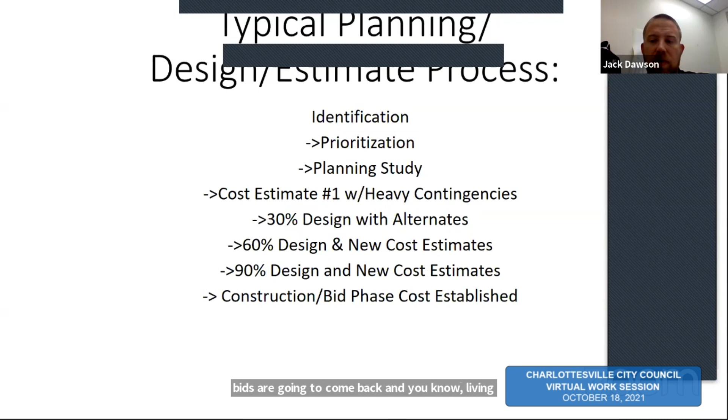And there's some more cost estimates at that phase. And then typically we work through 90% where all the final details are sorted out. And then the real cost here comes when the project's bid, which I do think is important. Even when we're working with very good estimates, you cannot control how the bids are going to come back. And, living through what we just lived through with logistics and costs, supply chains and all that stuff, things can get out of control.

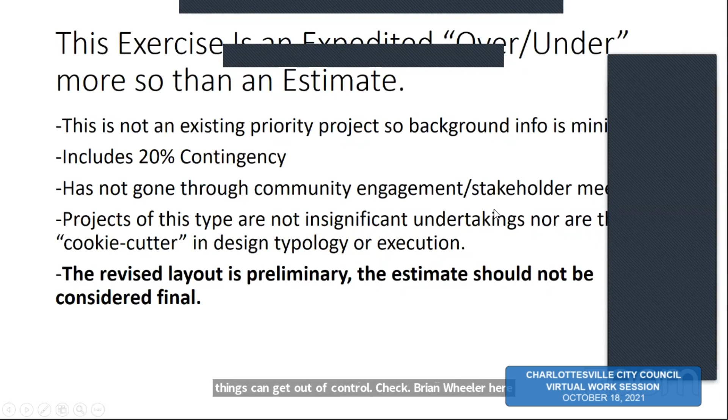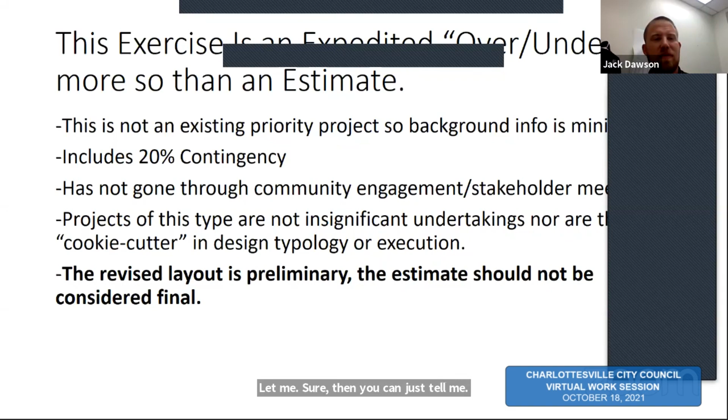Jack, Brian Wheeler here. We're getting some blue bars on your presentation. Do you want me to share the PDF? If you would. Let me do that. Sure. And then you can just tell me. Is this the ADA PDF? Not sure. That's going to be a struggle because that doesn't have pictures and whatnot. It's whatever was in the council packet. Okay, this will work so far, I think. We might have an issue when we get to pictures and the like. Okay, go ahead and tell me when to advance.

Okay, so this is more of an over under than an estimate, as I said, and this is sort of where I put my money on being over. So this is not an existing priority project, so we have minimal background information. We've sort of done planning analysis before, but that's about it. This has a 20% contingency, again, as the design gets finalized the cost typically goes up. The estimates typically go up as contingencies decrease in this process. So this is 20%. Typically, I'd use a larger one at this point, but I try to be as accurate

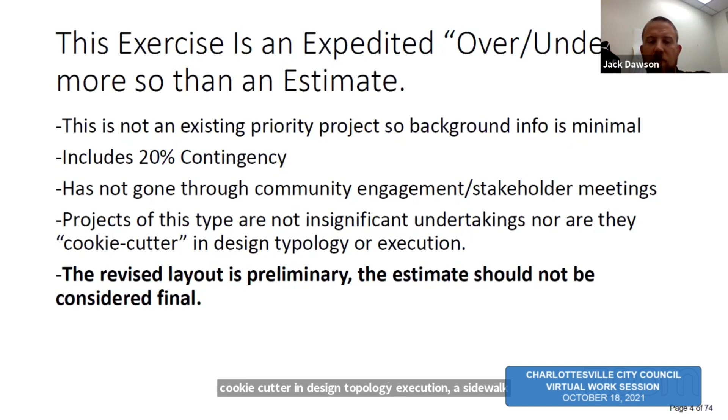as possible. This has not gone through community engagement or stakeholder meetings, which can add significantly to a project, as you may be aware. And then projects of this type are not insignificant undertakings, nor are they cookie cutter in design, typology, or execution. A sidewalk is not just a sidewalk. I've talked about that before, but infill, this is all developed. We're trying to wedge something into an area where it has not been wedged in before, and there's always other

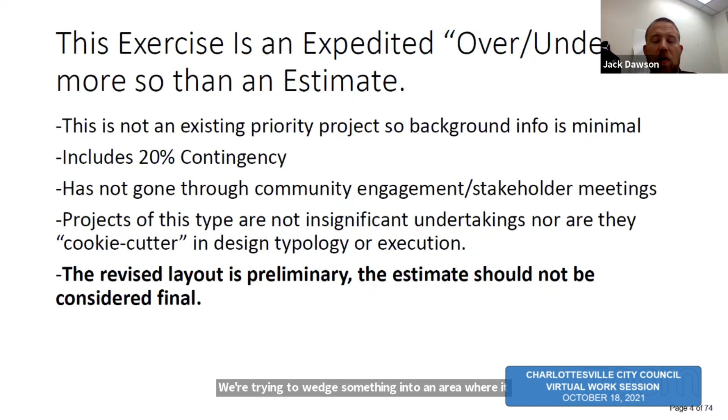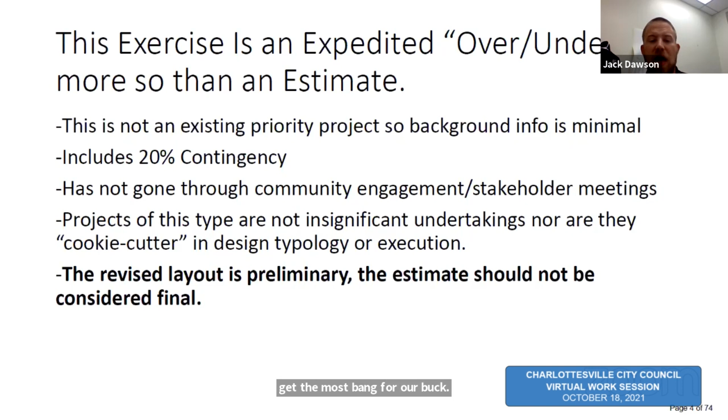issues with that. And so I have a revised layout here, removing sidewalks from both sides of the road and just putting it on one, which is where the city's always felt we'd get the most bang for our buck. But that layout is just preliminary. It's not a final plan or anything. You can advance, Brian.

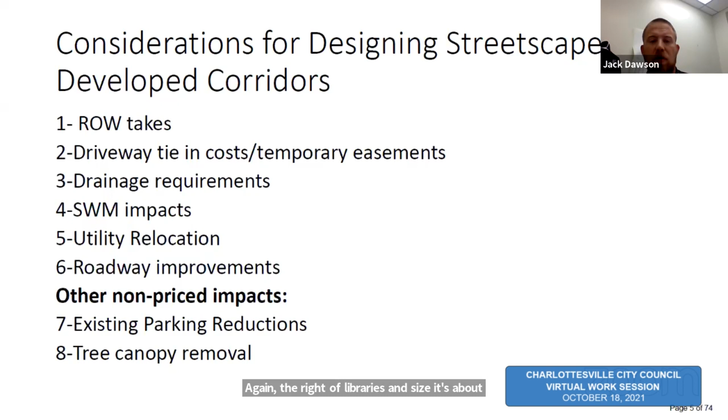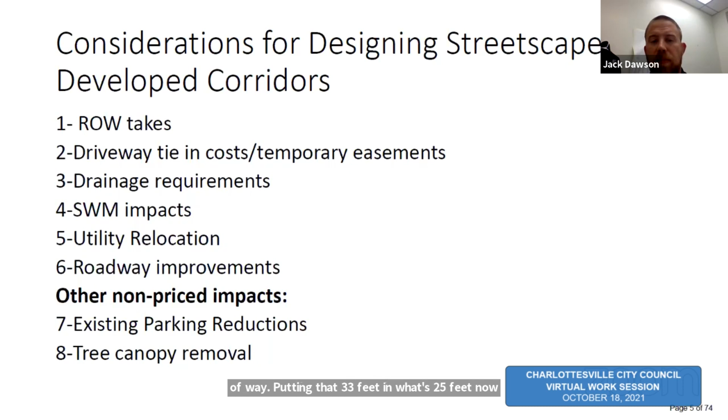Okay, so the considerations that I use for designing streetscapes in these developed corridors is the right-of-way takes. Again, the right-of-way varies in size. It's about 25 feet. The consultant provided 5-foot sidewalks on both sides for a 33-foot right-of-way. Putting that 33 feet in what's 25 feet now requires taking right-of-way to facilitate that. The second category for costs is the driveway tie-in costs and temporary easements associated with doing work on private property.

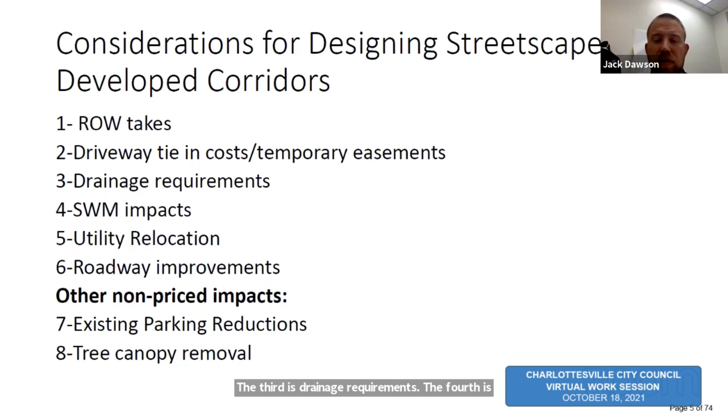The third is drainage requirements. The fourth is stormwater impacts. The fifth is utility relocation, and the sixth is roadway improvements. I did not have as much time as I hoped to get into this, so I didn't get too much into number 5 and number 6, but I'll discuss that when we get there. And then the other non-price impacts I wanted to point out are there are going to be existing parking reductions, and there'll be tree canopy removed as well. Next slide, Brian.

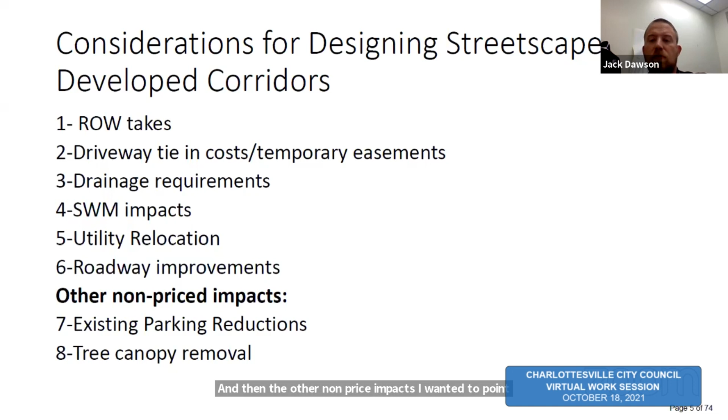So the steps taken here were to analyze the existing corridor for physical constraints with retaining walls, challenging driveway tie-ins, et cetera, and some preliminary safe crossing zones to revise the layout to sidewalk on one side. I then took the estimate that was provided and compared it with the revised layout to come up with areas where costs are likely to escalate and try and put some costs on those numbers, as well as qualify the non-cost related impacts. And then I revised the estimate for the likely escalations that I just discussed. Next slide, Brian.

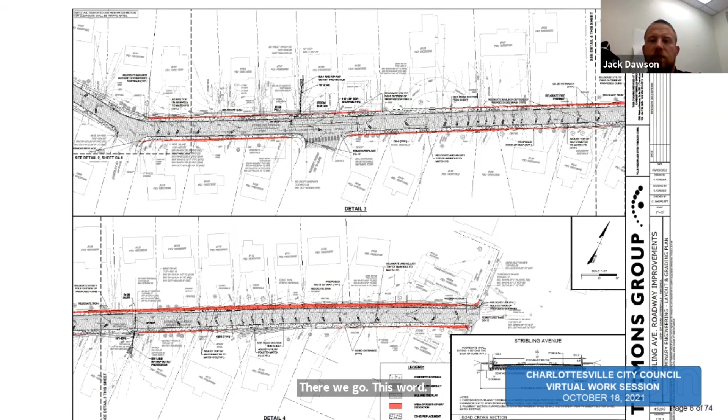So this is the provided concept. All right, there we go. This will work. Perfect. So this is what was provided to my office by the developer and their team. You can see the red hatching on this indicates where right-of-way would need to be taken. So you could sort of use your imagination to back out where it's not wide enough as is. The center line and alignment was essentially held to be the same point, which I think is a good practice. That means if you were to stand out there in the middle of the road right now where it's crested, that would be the future crest of the road.

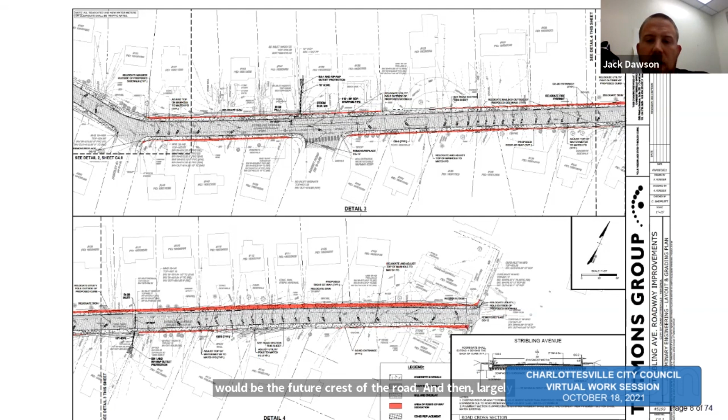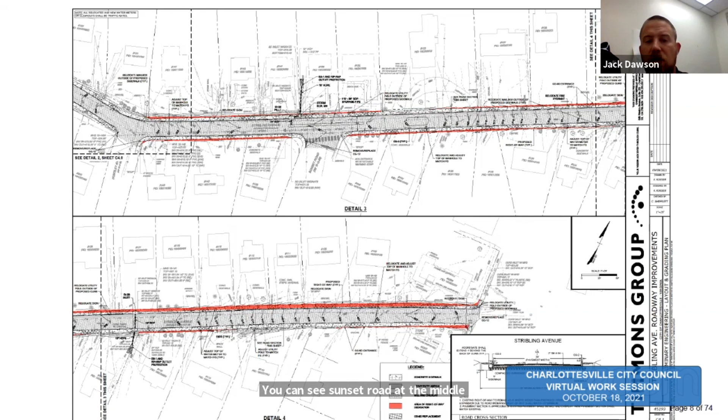And then it largely follows the same alignment with obviously the widening, editing that some, but you can see there's sidewalks on both sides. It starts at the bottom right here. That is JPA. You can see Sunset Road at the middle top with Huntley Road being at the left of this bend. Brian, if you'd advance it, please.

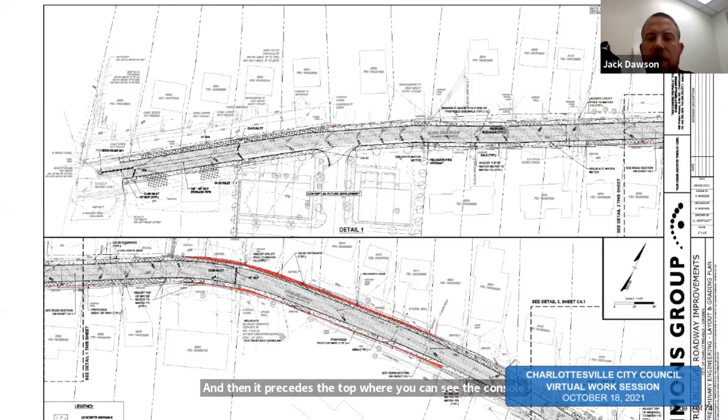It comes up through this bend, crosses the area that was Huntley Hall at the bottom middle, the large parcel there. And then it proceeds to the top where you can see the conceptual future development of 240 Stribling hatched there in gray with the developed area.

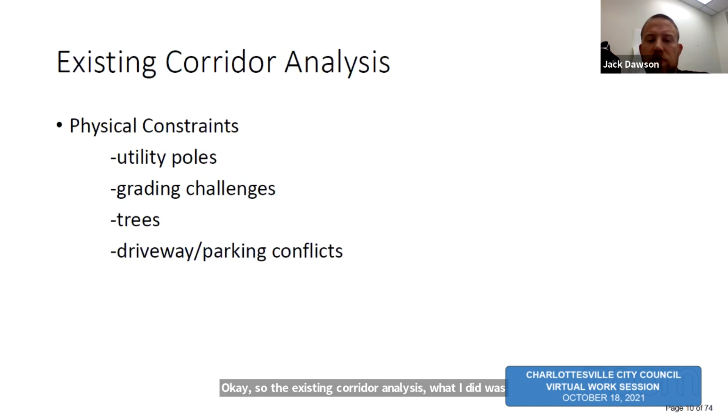Next slide, please. Okay, so the existing corridor analysis: what I did was I just looked at the existing physical constraints, utility poles, grading challenges, and I whittled it down some. So hopefully this next slide will work. Yeah, that's going to be a problem. Okay, well, at any rate, I'll do my best.

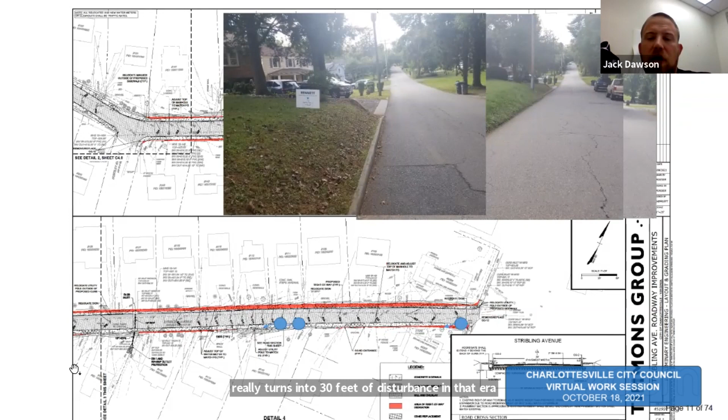It's going to give us the same problem here, but looks like you can actually see most of the pictures for the most part. As you move down past in front of Huntley Hall, you can see some of the conflicts here. So if you look at the top left where that red Mini is parked there in the gravel, that's right across from Huntley Hall, more or less. And you can imagine if you were to put a 5-foot sidewalk in that area, if someone was walking down that sidewalk, that Mini would be in the sidewalk, especially if it wasn't a Mini and it was a full-size car. You would not be able to fit that in there.

And if my pictures aren't covering each other up, you could see that that retaining wall beyond that Mini is collapsing. And the city has no business or interest taking a backhoe and trying to rebuild parking on that wall, replacing that wall, et cetera. If you look at the picture on the right, that is, I guess, just beyond Huntley Hall on the left. That's a similar situation where you can see that white car. The front of that is almost to the pavement as is. The existing pavement is 17 feet in some places. So by the time you make that 20 feet, add a retaining wall, we'd eliminate all that parking and necessitate a project to replace all that parking.

And then similarly at the bottom right corner, you can see where there's a whole lot of existing parking there serving an apartment building. And you can just see from where that existing gutter line is that we wouldn't be able to fit a sidewalk in there. So that kind of sums up where I ended up with the revised layout. And Brian, if you could go to the next slide, please. Next slide.

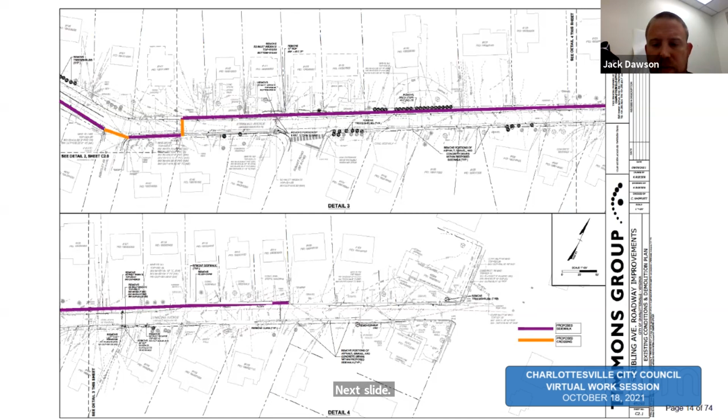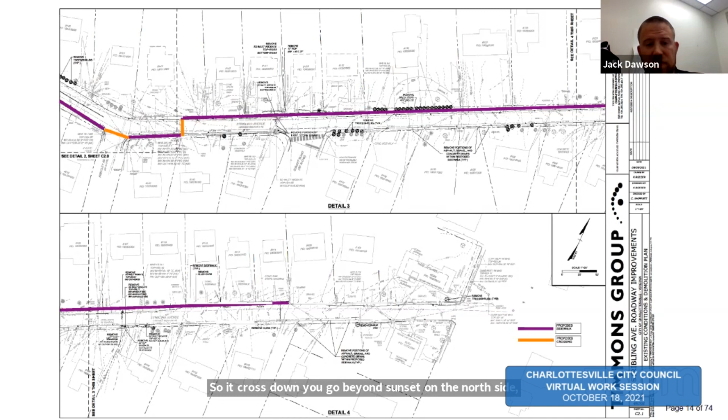So here's the revised layout. Looks like I missed a chunk of purple here on the bottom on top of Stribling, but the conceptual layout, this is not a design. This is a conceptual layout as I walked it, looking at those physical constraints and making assumptions about where logical crossing places would be. The purple is the new sidewalk and the orange would be crossings. Again, not set in stone, but based on obvious field conflicts that I discovered. So you go beyond Sunset on the north side, then cross to the south side of Stribling, cross Huntley. Next slide, please, Brian.

Cross Huntley again, you'd be on the south side, and then you'd cross in the vicinity of 220 Stribling, which is to avoid some of those retaining wall conflicts. And then it would continue on the north side till it returned you to the subject property. That's the development you can see at the top center.

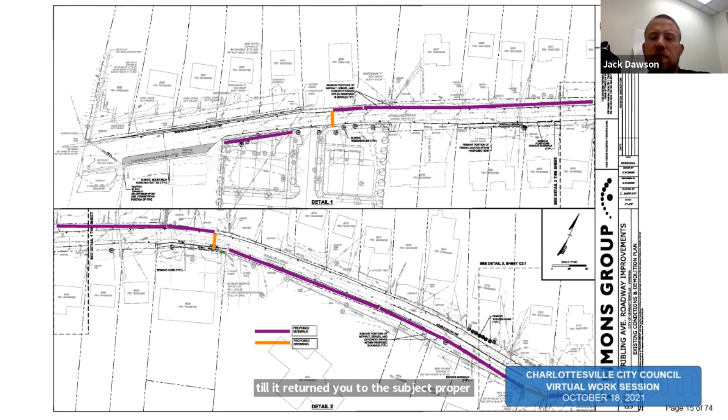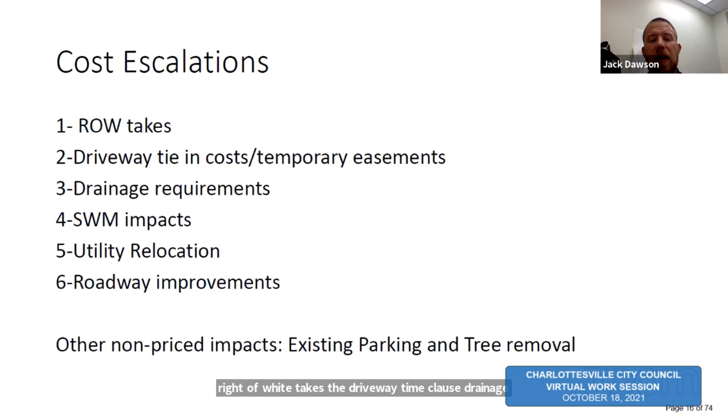Next slide, please. So moving on to cost escalations, as a reminder, it's right-of-way takes, then driveway tie-in costs, drainage requirements, stormwater impacts, utility relocation, and roadway improvements. Next slide. So this is the right-of-way takes.

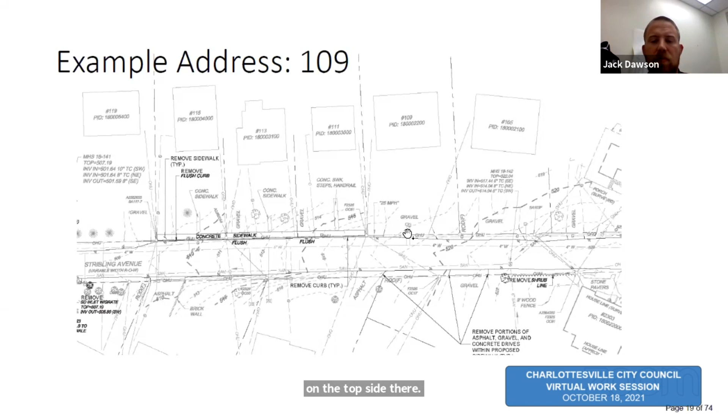So this category is the driveway tie-in costs and temporary easements. This gets a little complicated, but this is very important. So I took as example 109. This is one of the first ones that I noticed was impacted pretty significantly. This is towards Stribling side. You can see 109 is on the top side there. Where it says gravel, there's a rather wide driveway on either side, right where Brian's got the cursor. I think they could fit 3 or 4 cars in there right now.

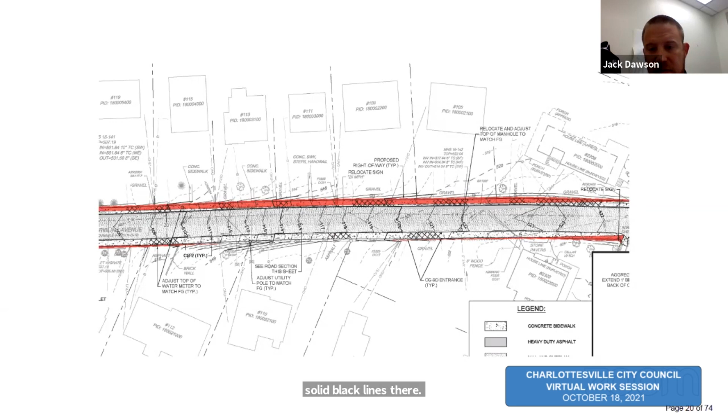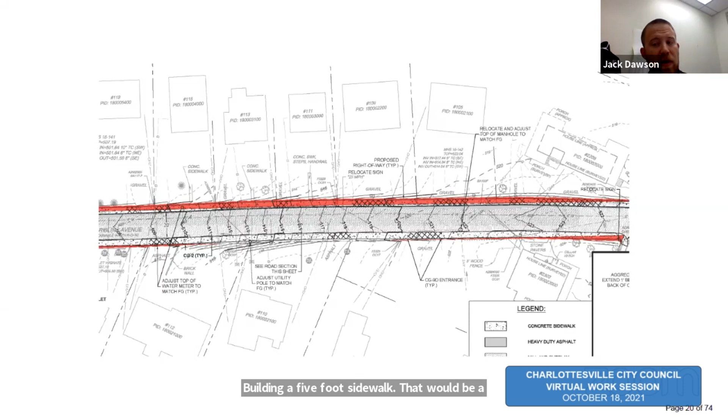If you advance the slide, please. You can see 109 right there in the middle where the proposed right-of-way typical symbol is. If you look outside that red right-of-way take, there are 3 solid black lines there. What that indicates is approximately 1.5 to 2 feet of fill as you're building up your curb and building a 5-foot sidewalk. That would be a vertical delta between the edge of that sidewalk and where that driveway currently is right now. That sidewalk is going to be about 18 to 24 inches above that existing asphalt or gravel driveway. Next slide.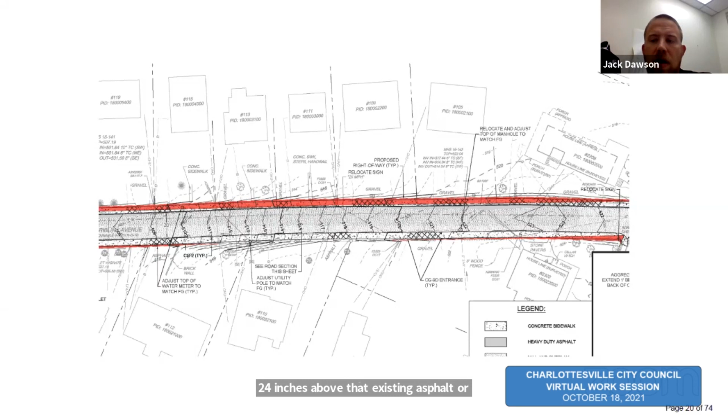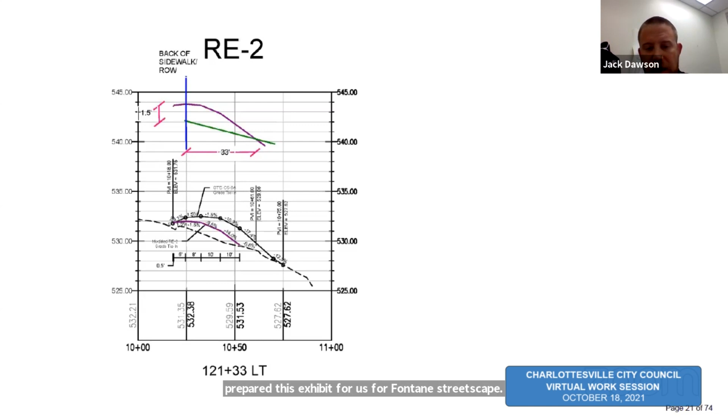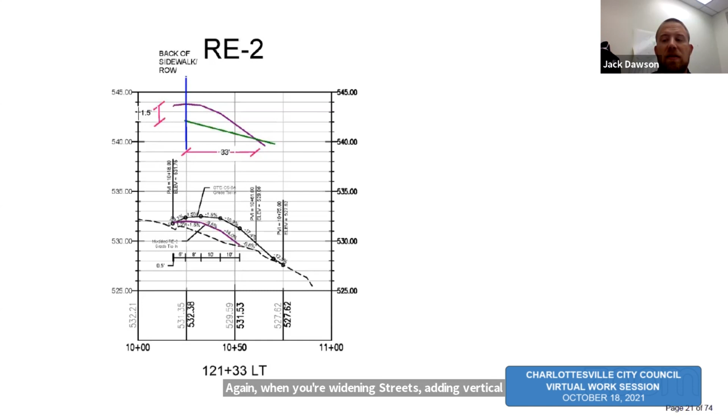How that's relevant. So this is from another plan set of ours. Let me just make sure I credit everybody. RK&K prepared this exhibit for us for Fontaine Streetscape. They prepared this little thing on bottom where they inserted what I drew a purple line over, which is their modified grade tie-in. Again, when you're widening streets, adding vertical gain via sidewalks and driveway lips, it creates issues tying back into that driveway. So I showed that 1.5 foot delta and I drew that green line in approximately at what the existing slope is.

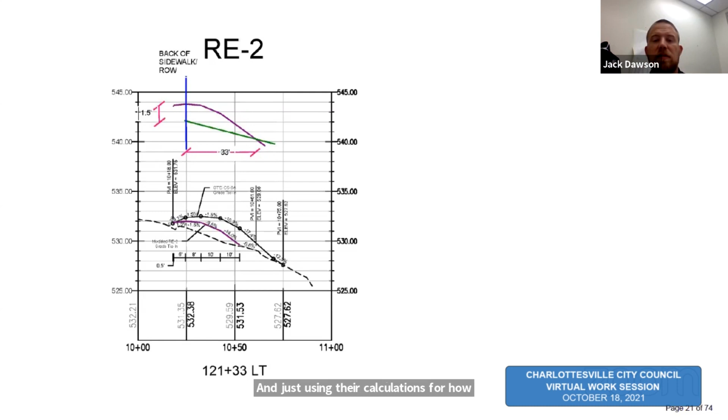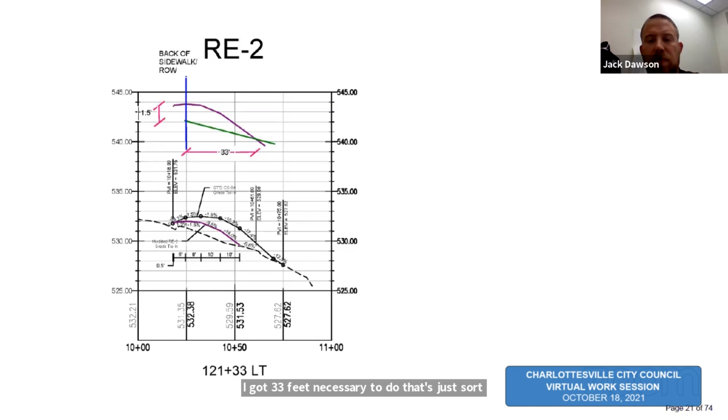And just using their calculations for how quickly they could chase grade. This is to do things like make sure you don't tear bumpers off of low cars when you're making these tie-ins. I got 33 feet necessary to do. That's just a little bit of math there. Brian, next slide, please. And so you can see here, my little sequencing isn't working, but that gray area represents the area that would need to be built in order to tie their driveway in from the proposed road surface. I hope that's making sense.

And so if you look at that purple contour I drew in, that's a contour line that ties in with the 519. So the 519 would not have a 6-inch jump there. It would gently slope up with a driveway entrance. And the green shows the 518 contour that would need to be graded in, maintaining the existing crossover of their driveway. And the problem with that is, one, that's quite expensive. And two, the existing flow path is that blue sweeping line you see going through the middle of the screen, ending at the left. That's where the water flows right now. That's correct. It goes from right to left.

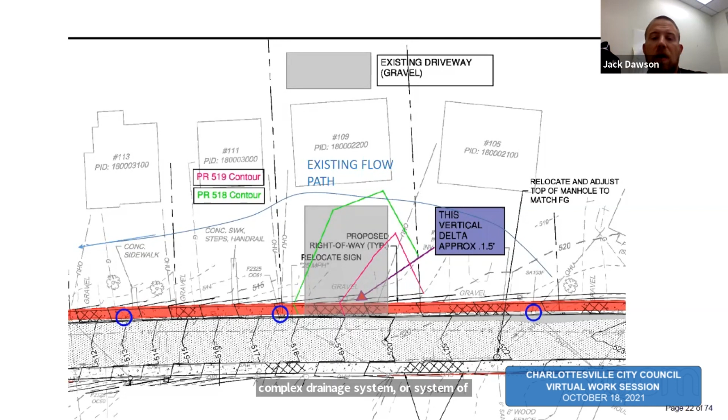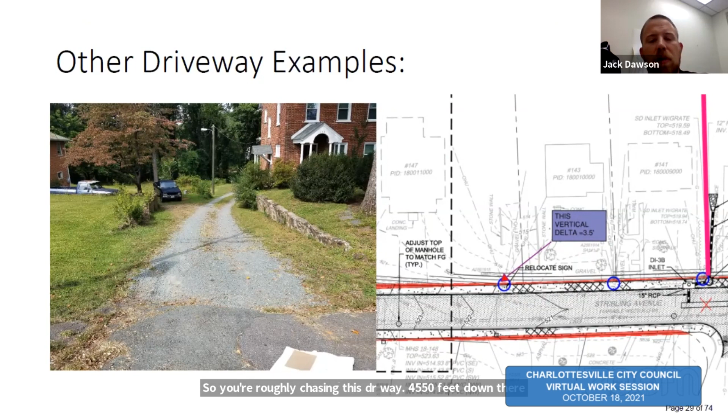So this is another driveway example. This picture doesn't do this driveway slope justice, but this is at 143. This is a pretty aggressive drop off. You can see the retaining wall there. Again, depending on the sidewalk impacts, this would be a pretty considerable tie-in. You can see that delta I've identified in that schematic is 3.5 feet vertical delta. So you're roughly chasing this driveway 45, 50 feet down there with non-erodible surface as the code requires. Next slide.

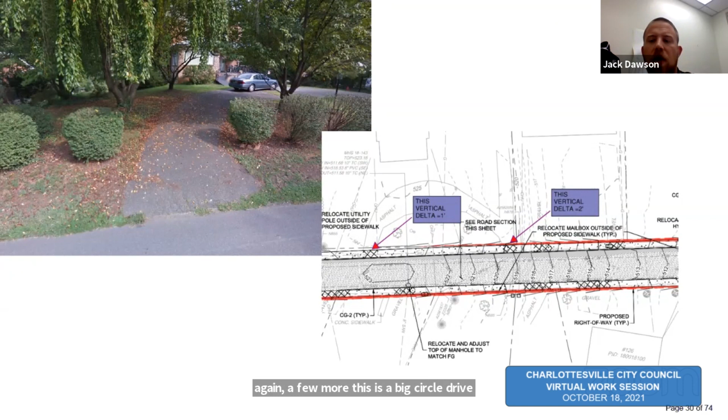Again, a few more. This is a big circle driveway. Looks like it's, I think, across from like 128 or so. We got a 1 foot vertical delta and a 2 foot vertical delta. That picture shows it pretty well. Next picture. Next slide. So now we're moving on to basic drainage requirements. So this is not totally unrelated to what we were talking about earlier.

Next slide. So right now, and this is where a lot of the cost comes in, water hits the road, it sheet flows off of the road into yards. It might flow through those yards somewhere else. Right now, this is at the first outfall upstream. This is the inlet that receives that. If you were to convert this to a curb inlet and build a curb behind it, a 6-inch curb, you're creating a pond beyond that elevated area where water cannot flow across the sidewalk.

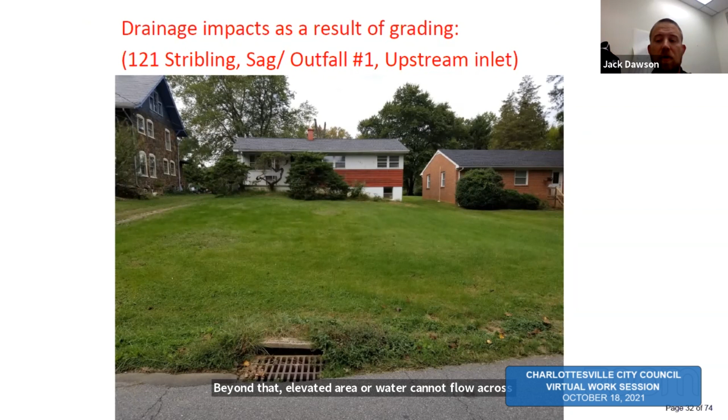So you either have to chase grade in those people's yards 20 feet to promote flow across the sidewalk, or, next slide, and associated with the driveways, create that little pink square and pink line in the middle, which is what would be done there to drain the pond that we've created in front of all those yards that is being bermed or impounded by the new sidewalk. Next slide.

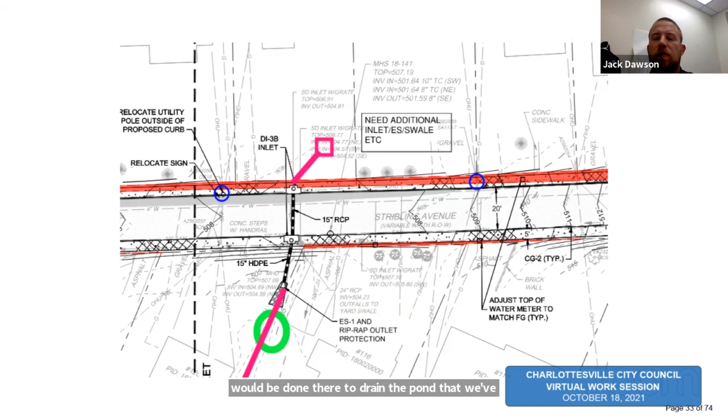On-road drainage as a result, spread requirements, I think is what that says. So similar problem. This is down near Huntley Hall. You can see the green area. That's about 1/2 acres that drains towards what I believe is outfall 3 here, which is just where that green line ends on the left in front of 220.

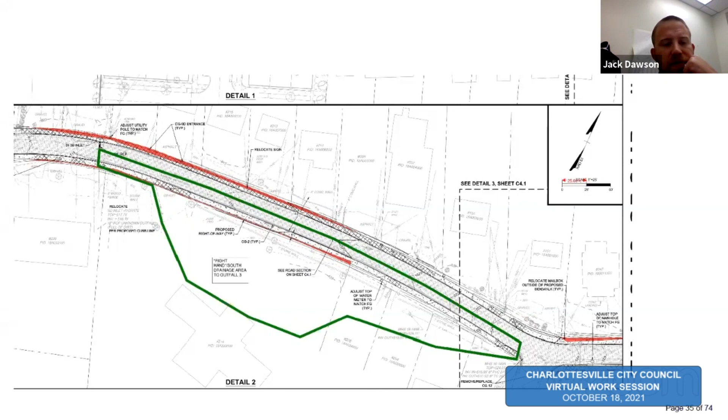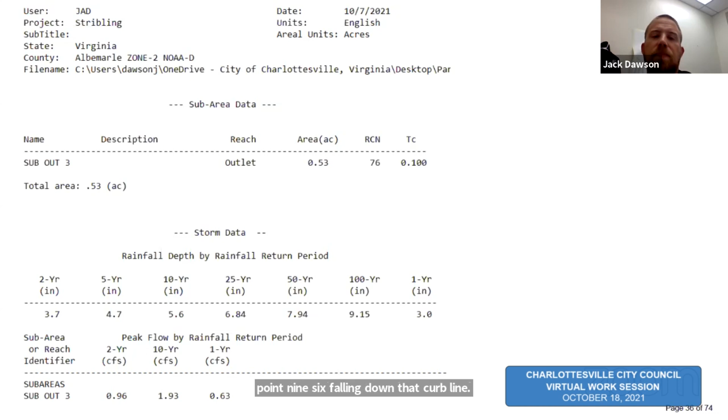I just did some very rough calculations, next slide, for this, and using the 2-year rainfall, which is 3.7, which is actually less than the VDOT requirement of 4-inch intensity, we're getting a discharge of about 0.96 flowing down that curb line. Next slide. The result of that is a spread of 7 feet. VDOT says you cannot have that rain intensity go more than half of your lane width if there's no shoulder, which is 5 feet. So that exceeds it.

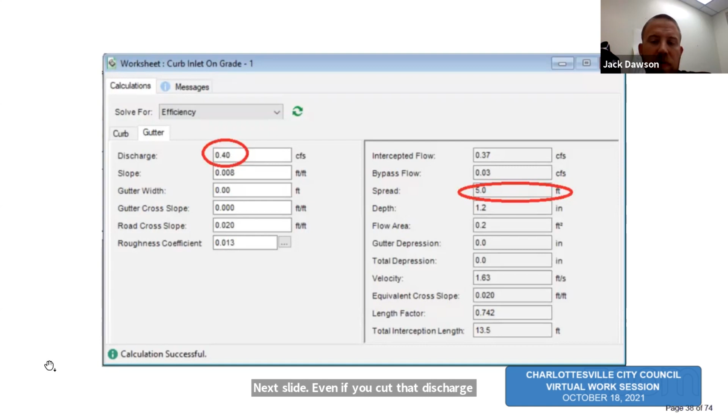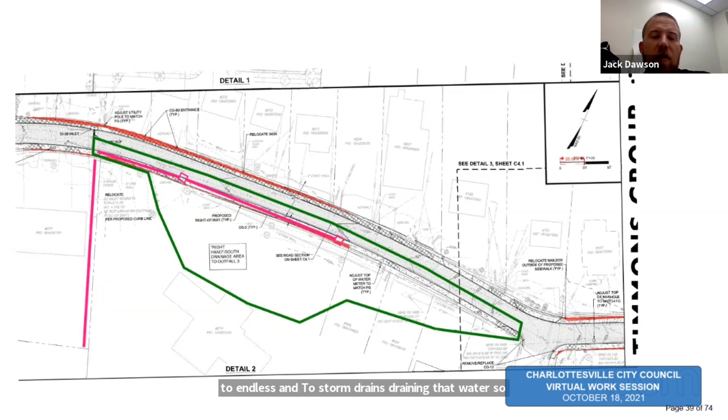Next slide. Even if you cut that discharge more than half to 0.4, we're still just meeting it. So what that means to me is we need at least 2 inlets there. Next slide. So you can see where that pink on the road are 2 inlets and 2 storm drains draining that water, so that when you curb all this stuff, it doesn't flood in every rainfall and create problems with icing, splashing, the whole thing for basic road requirements. Next slide.

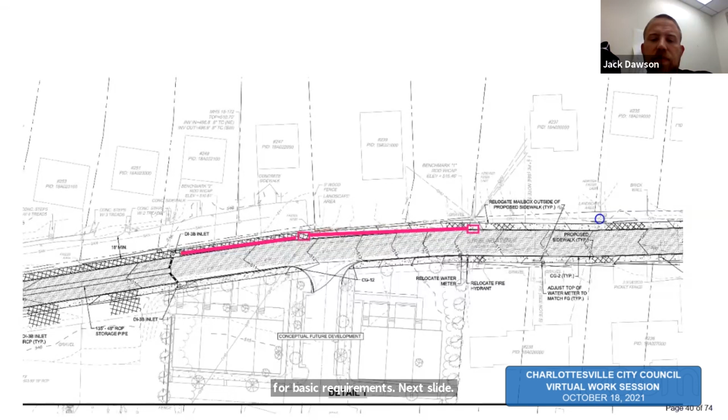And this is outfall 4 down across from the subject property. I did a similar calculation. There are probably some inlets required there. Again, this is not exhaustive. It's just to demonstrate when you start looking at these things, how expensive they get.

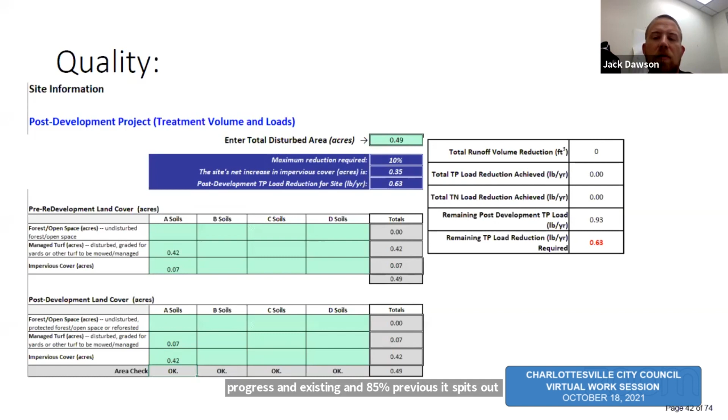Next slide. Now we're moving on to stormwater impacts. So this is both quality and quantity. Next slide. This is a VRRM sheet. This is what we use to calculate quality reductions required. I assumed 8-foot section, I believe, for the entire thing, with being 15% impervious and existing and 85% impervious. It spits out 0.63 pounds required reduced a year, which turns into about $10,000 or $12,000 worth of nutrient credits.

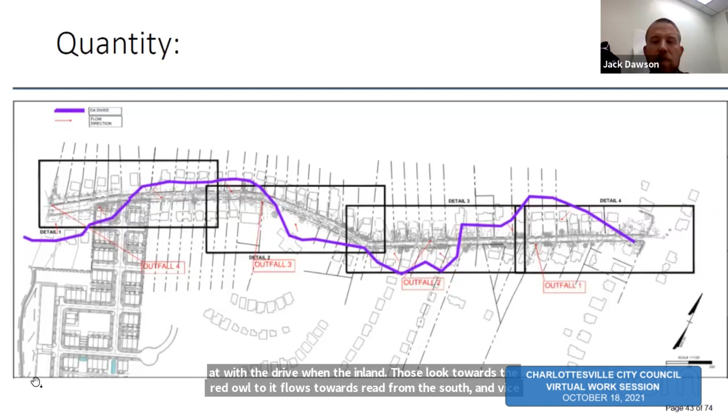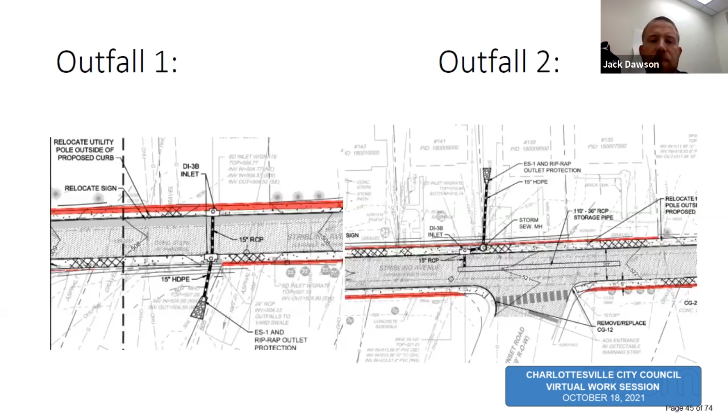So as we move to the outfall conditions, next slide. Next slide. So this is what was provided by the consultant and the development team. This is outfall 1. They show replacing those inlets and extending the pipe with outlet protection. Outfall 2, they show a 36-inch storage pipe in the right of way. Next slide. Outfall 3, there's just replacing that pipe in one of the inlets, and outfall 4 has another detention facility in the right of way.

Next slide. So this is outfall 2. The purple is a 36-inch pipe that's being proposed to be installed there to detain water. There's a few issues with this. We really frown on putting detention in the right of way for a whole litany of reasons. It gets added to our public service crew list of pre-storm activities. You need to go make sure all these things are not full of leaves, not clogged. And then generally you're supposed to have self-cleaning inlets in the right of way. You're not supposed to have them flat where silt can be collected. They're supposed to be self-cleaning and maintain a minimum velocity of 2 feet per second.

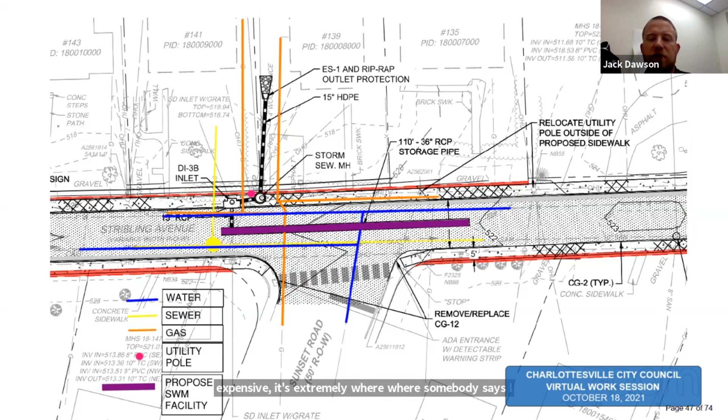Furthermore, the orange lines here are all gas, the yellow sewer, the blue is water. There's a lot going on here. If you imagine just looking at this in plan view, if you sort of look from the side, most of those things would have to be relocated. So I did not bother estimating what the cost of something like this would be. I just scratched it. But I did want to illustrate that the more you look into a concept, when you go from concept to design development, things get more expensive. It's extremely rare where somebody says, oh, we'll have to adjust this, I just made it cheaper. That very rarely happens. Next slide.

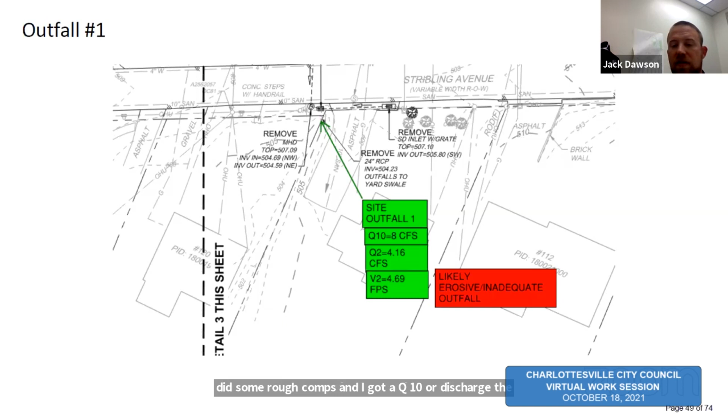So more likely what we'd have to do is these revised conceptual outfalls. This is outfall 1. Again, I just did some rough comps and I got a Q10 or discharge in the 10-year storm of 8 CFS and discharge in the 2-year storm of 4.16, which translates looking at that swale to a velocity of 4.7 feet per second, which is likely erosive.

Next slide, Brian. This is what that looks like right now. It doesn't look too bad, but as you can see, that inlet gets very little water, as does the other. After those flows creep through the people's front yards, in over the curb or over the grass berm, into the road, into the inlet, it comes out. It would be happening a lot faster in the closed condition. Next slide. So that pipe would at least need to be extended down some distance till you can find a natural channel that will accept it without being erosive.

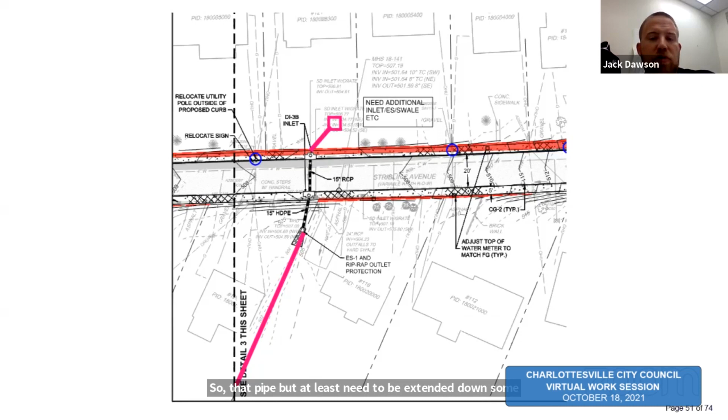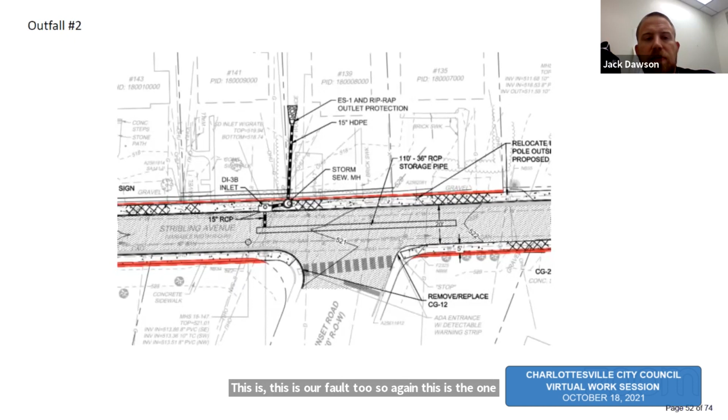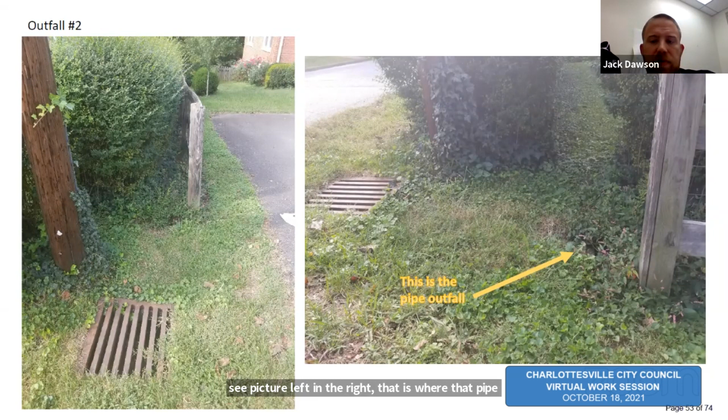Next slide. This is outfall 2. So again, this is the one where the consultant showed that detention pipe. Next slide. This is that pipe shown, or the inlet shown rather there. You can see in picture left. In the right, that is where that pipe daylights right now. So that would need to be addressed. Next picture. You can see the consultant showed that pipe system that discharges just sort of a little bit in front of where those people's houses are, which is never a good idea. So I just showed it sort of arbitrarily continuing beyond there. Again, we need to identify an acceptable outfall location.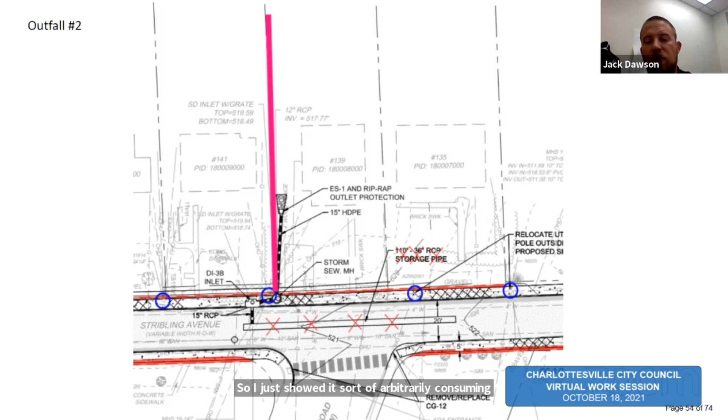Next slide. And this is a picture of where that pipe would have to go, whether it's the shorter pipe from the consultant or the pipe that I showed. The point being that that is not costed as a line item for storm drain installation. You can see the utility pole. There are gas utilities in there. And there's no receiving channel. Right now, it essentially doesn't function. So there's very little erosion, but that would have to be investigated. Next slide.

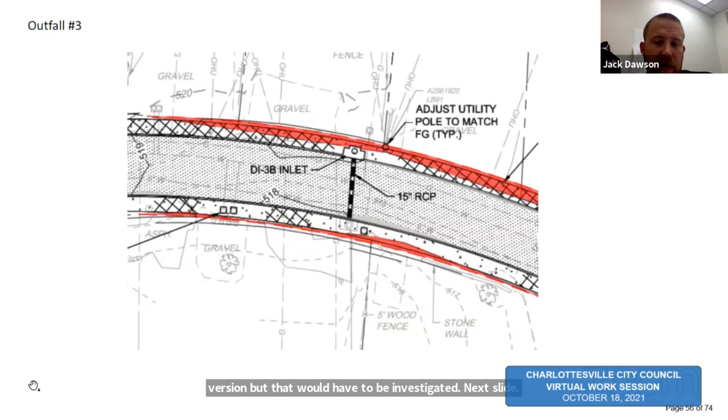This is outfall 3. This is, again, you can see the consultants proposing replacing this pipe in the roadway for some reason. Next picture. This is that outfall. This is what the manhole looks like on the left. You can see all that mud. This is the outfall pipe. That mud is the same mud in the left picture.

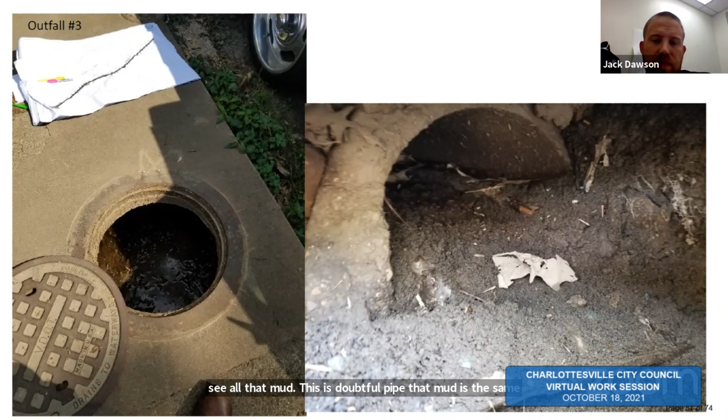So that pipe, which is maybe 8 inches, has about 1.5 inches of cover. In fact, if you go to the next picture, you can see the pipe under the ground there. And one of the gentlemen that lives there told me that the only place he's ever seen water coming out of the ground is that hole, which is hard to see, but it's under his truck. I went downstream. He gave me permission to go downstream and look.

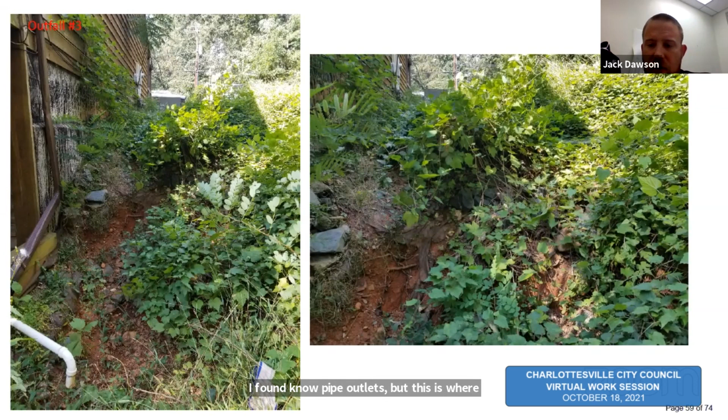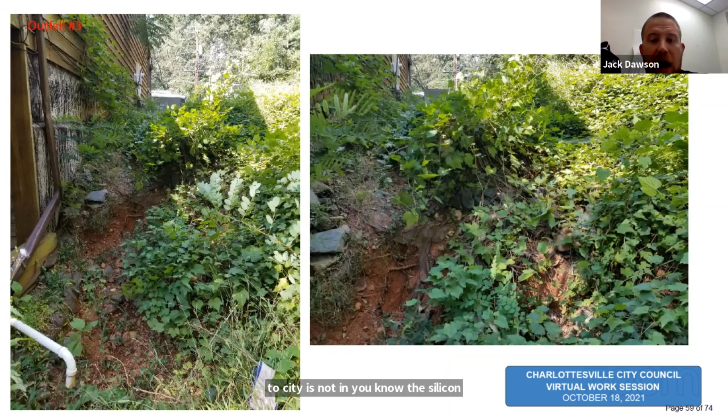Next slide. I found no pipe outlets, but this is where that water ends up going. This is, you can see, an adjacent foundation. The city cannot contribute more water to this situation and expect not to be hearing some problems. So next slide. Well, I thought I had showed a pipe going in there. At any rate, that pipe would have to be extended beyond their house. That requires considerable construction, mobilization, easements, sediment erosion control, it's the whole thing.

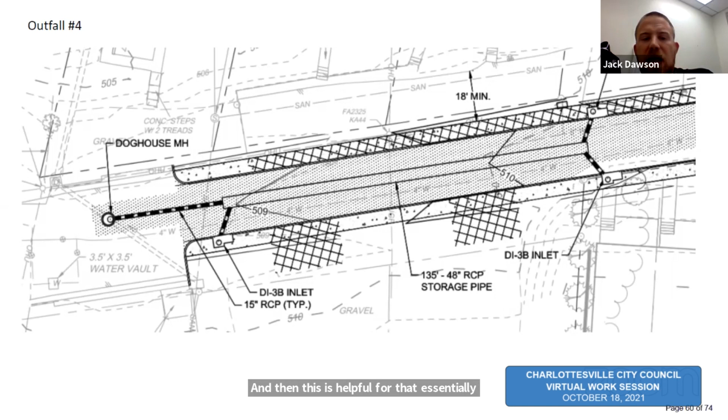And then this is outfall 4. That's essentially the city-county line. Slide left. And next slide. I didn't do a full analysis of it. I did not go down and look where it went. Looks like it's a pretty good sized pipe. It almost certainly, based on all my experience working in the city these last 3 years, does not discharge to an acceptable outfall, and something would need to be done, whether it's quantity mitigation at the street, a bioretention or something, or running that pipe and doing some channel upgrades. Next slide.

So I had $53,000 for the first outfall, $75,000 for the second outfall, $100,000 for the third, and I just threw a number at $80,000 at the fourth because that would involve more analysis than I'm prepared to do at this time. Next slide.

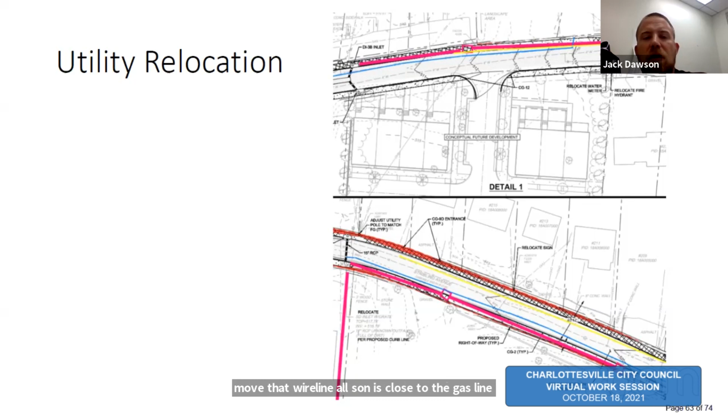Utility relocation. Again, I only added these two red lines you see here. These are the storm drains we talked about earlier. The blue is the water line. You can't put utilities 2 feet away from each other anymore. So we'd have to move that water line. Now you move that water line, all of a sudden it's closer to the gas line. You got to move the gas line and it continues. I did not reflect very much cost for utility relocation in my estimate, however. Next slide.

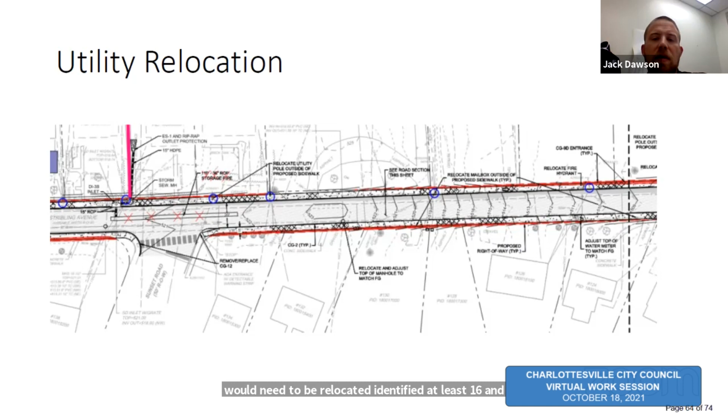Similarly, all those blue circles, those are all utility poles. The consultant identified 4 that would need to be relocated. I identified at least 16. And again, that's based on having sidewalk on one side. And those are about $10,000 a pop. Next slide. Roadway improvement costs. I did reduce the cost for sidewalk because I only had one sidewalk in my concept where the applicant had 2 sidewalks. Next slide. Other considerations. Next slide.

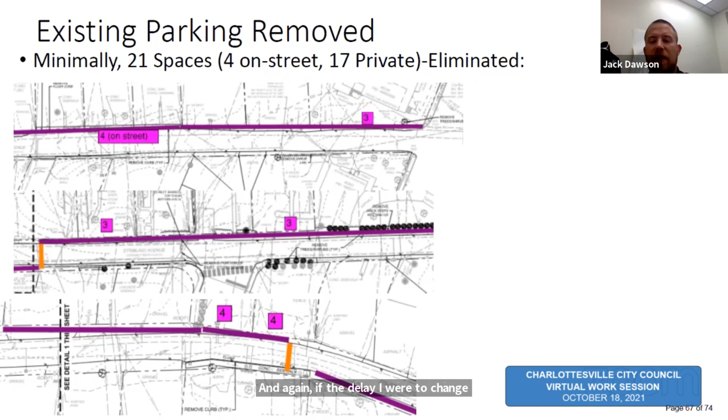So the purple numbers are parking that would be lost, feasibly lost, and the sidewalk would likely displace them. I'm not sure the zoning, but there's lots of shared use rental houses there and the whole thing. But this was my determination of what physically could actually go back. So that being said, there's 21 spaces lost. 4 are the on-street, which are sort of right down there near JPA, then 3 throughout and 4 further down. And again, if the layout were to change from what I put together here, all that changes, usually gets worse, not better. Next slide. Then tree removal, I counted 19 trees.

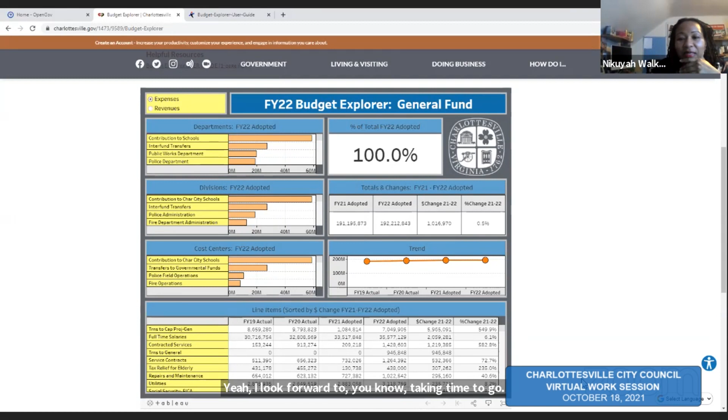So that really sums it up. Sort of the nickel tour there. It's available on the website, and it's really kind of cool and fun to play with. So feel free to go and click around and explore the budget. Anybody have any questions? Oh, that is great. I look forward to taking time to go and explore. Councilors, any questions or comments? No, just appreciation for the work here to provide this kind of a tool to the community. I heard it was coming, and I'm super excited to see it out there live. Thank you very much, Brian.

Now, is this on the front page of the website, or do you have to go to the budget page to get to it? You have to go to the budget page. So here's the budget page, and then this little icon right here, Budget Explorer. Is there a link to it on the front page? There is not, but that could certainly be added. Any other questions or comments? Thank you. This is what transparency is about, and it's really awesome. Thank you.

I'm going to enjoy wasting a lot of time after 2 o'clock in the morning clicking around.

Yeah, I think the public has been asking for this for a long time, and it seems like a user-friendly creation. So that looks very good. Thank you all for working on that very much. Yeah, and when we present the proposed budget in March, this will be updated with the 23 budget. So during the work sessions and as we have conversations, you'll be able to use this tool as well when you're looking to make decisions on what you want to put in the approved budget.